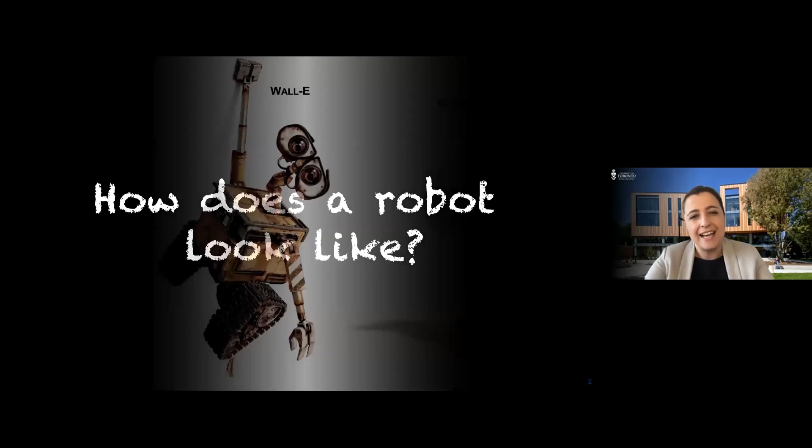I guess some of you have been thinking about some robots that you have seen in movies. I put some on the slide. You can see Wall-E and Eve from the Disney Pixar movie, or Baymax from another Disney movie some years back. Those are great robots. They usually show what we roboticists would love to be able to do with our robots, but usually we're not quite there yet.

In fact, most robots in reality do look like those robots on this slide. The majority of robots today, those up here, are used in industrial automation. They are used, for example, in the automotive industry to automate tasks that are repetitive. There's also a huge area of service robotics. The biggest use case is logistics and warehouses, where these tiny robots here are carrying around goods to facilitate a faster logistic process.

Some of you might also have a service robot at home, a vacuum cleaning robot or a lawn mowing robot. And eventually, you have also come across some other service robots like surgical robots. This up here is a surgical robot system from Intuitive Surgical, which is used in a teleoperated mode, meaning that the surgeon teleoperates the robot from a console for laparoscopic surgery.

And then lastly, there are some robots that are more human-like in their appearance. They have arms and legs and walk around, but those are only slowly getting into our realities. They are mostly still research and development.

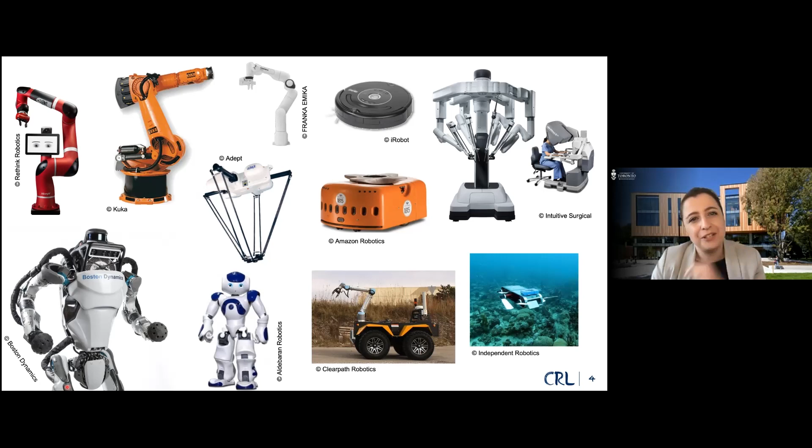The robots that I've been showing you here are in fact not the robots that I'm working on. But before I'm going to tell you what kind of robots I'm working on, I wanted you to know about my favorite animal. Ever since I was a little girl, I loved elephants. I am really fascinated by elephants, particularly by their trunk.

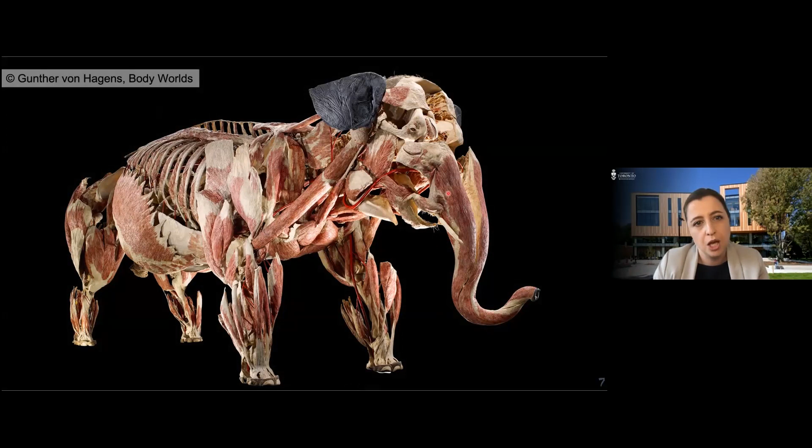In fact, when we look at this plastination of an elephant from Gunther von Hagens' Body Worlds exhibition, we can see that the elephant trunk itself is composed of a multitude of muscle fibers, 40,000 to be exact. The elephant trunk is a muscular hydrostat, which enables the elephant to control groups of these muscles to bend, twist, and elongate.

So it's only natural as a researcher to ask the question, can't we build robots with no joints in order to resemble similar motion capabilities? Isn't it possible to build a robot that acts like an elephant trunk and that can bend continuously, twist, wrap around objects, and reach places hard to reach?

As it is in science, we all stand on the shoulders of giants. I have not been the first elephant enthusiast and roboticist asking this question. In fact, this area of continuum robotics research is about the same age as robotics in general. The first continuum robot was developed in the mid 60s, which you can see over here. It was developed by two students, Scheinman and Leifer at Stanford University.

They developed this pneumatic-driven continuum robot that you can see here, which is now on display in the Computer History Museum in Mountain View, California. They abandoned it because the movement was not very precise, it wasn't a great robot, and it was quite short. But you can already see that in later research, this elephant never really left researchers' minds, and they have been building all sorts of robots resembling elephant trunk-like structures.

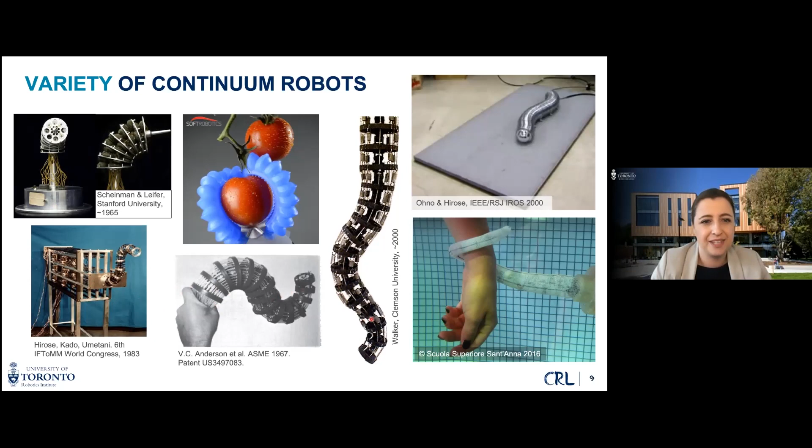In fact, there are also some commercially available continuum robots that you can see over here, for example, from Festo or OC Robotics. These continuum robots resemble pretty much the size of an elephant trunk, whereas this one over here is even longer. This continuum robot you can see over here is the longest available. It's 5 meters long, 3 meters of which can be actuated.

But these continuum robots have a problem. While they resemble the elephant trunk nicely, and they are certainly really amazing to watch, they didn't bring any benefit to robotics, particularly not to industrial automation, because the size and payload, so the size of the robot versus the amount of load it can carry, is really not that great. This robot over here can only carry 3 kilograms of payload.

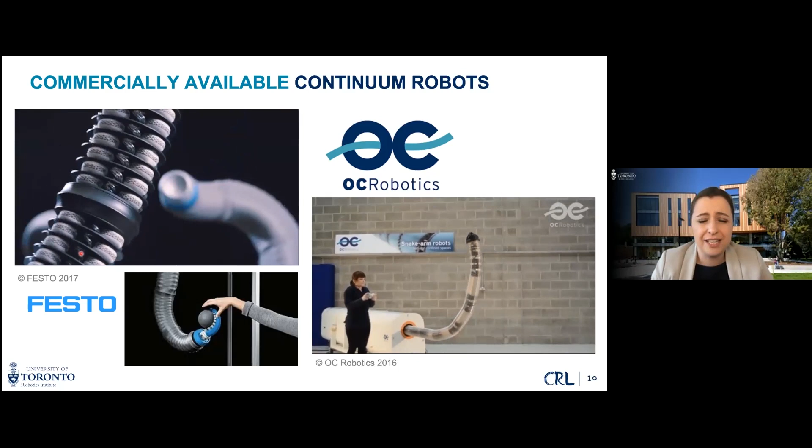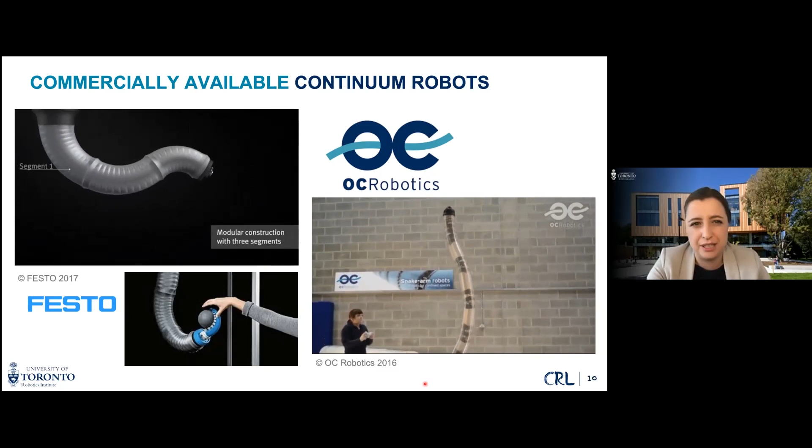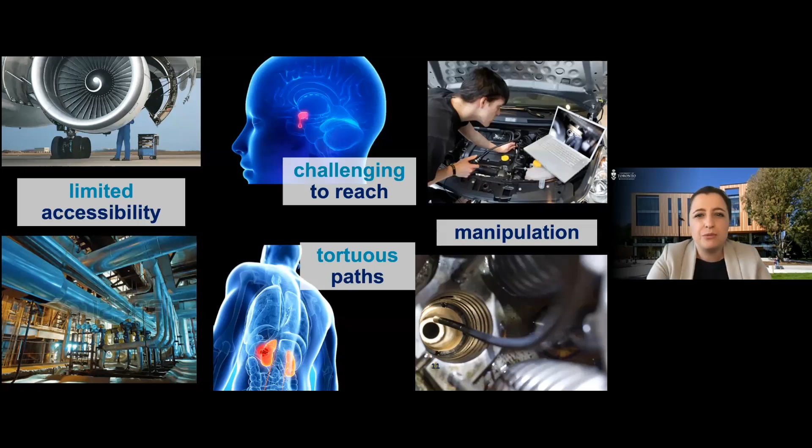Now, this doesn't go well with most industrial automation tasks. And that robot over here also has a pretty low payload. So there was really no advantage in building a robot that can resemble an elephant trunk, other than these motion capabilities being really amazing. These continuum robots do actually not help us in any of these tasks that I have on this slide here. Existing continuum robots and any other robot out there cannot really address what I envision them to do when I'm thinking about this elephant trunk and its motion capabilities.

When I see this elephant trunk, I'm thinking of all sorts of applications which could benefit from something as dexterous as the elephant trunk. Any application that has limited accessibility. Any application, for example, in medicine, where you would like to reach a location deep-seated within the human body, like in the center of our brain or in the middle of our abdomen, like the kidneys.

And I'm also thinking of, once I reach these locations on curvilinear path, how to manipulate at the site, do some inspection, for example, or some small repair, or a tiny little surgery. So while the elephant trunk is really motivating for me, the size is not. So the robots that I am working on are small robots without any joints. And these small robots without any joints are also continuum robots. I'm just interested in those that have a smaller diameter to length ratio.

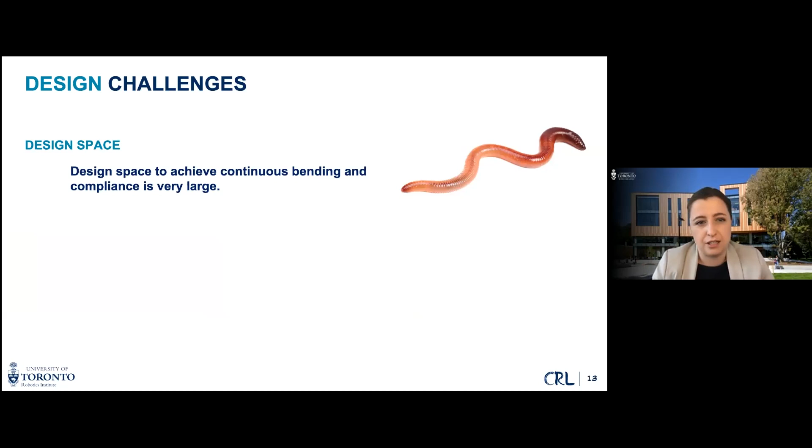In the Continuum Robotics Laboratory, we are designing these robots. We build them from scratch in-house. And in doing so, we are facing a lot of design challenges. First of all, the design space to achieve these continuous bending motions, and also the compliance that we see in the animal kingdom, is quite large. Second, there are many different design paradigms that we cannot follow, because many of the design paradigms that we teach our engineering students are usually making use of rigid elements. And so having no rigid elements in a robot is somewhat unfamiliar to us designing these kind of robots.

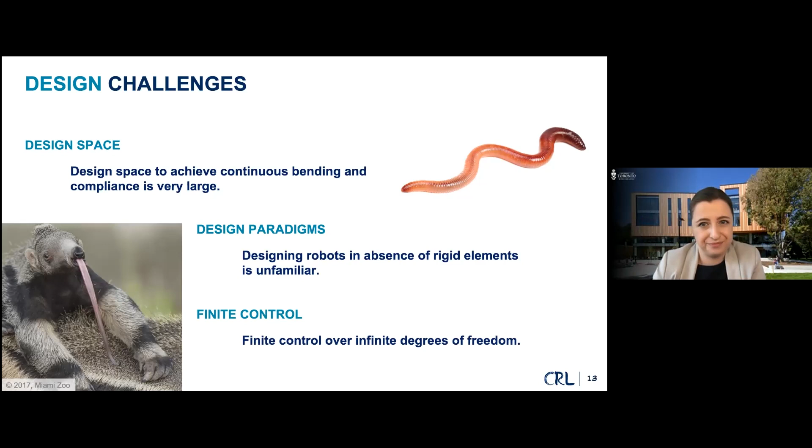And lastly, while these 40,000 muscle fibers in an elephant trunk sound amazing, it's going to be really hard to control 40,000 instances of an actuator. So we will need to live with a finite control over these theoretically infinite amount of degrees of freedom. So how do we go about this? How are we designing continuum robots?

Intuition could tell us, well, we could stick to what we know. We could stick to what works well. So we could stick to what we know from serial robot arms, just connecting joints with rigid links, a couple of revolute joints, all in series, and then making these links rather short, such that we have a discrete structure with motors in these individual links that could drive this snake-like robot. This is a good idea and has been helping in developing these larger scale continuum robots, but it doesn't really miniaturize well, because there's obviously a physical boundary in terms of how small you can make these motors and how small you can make these links.

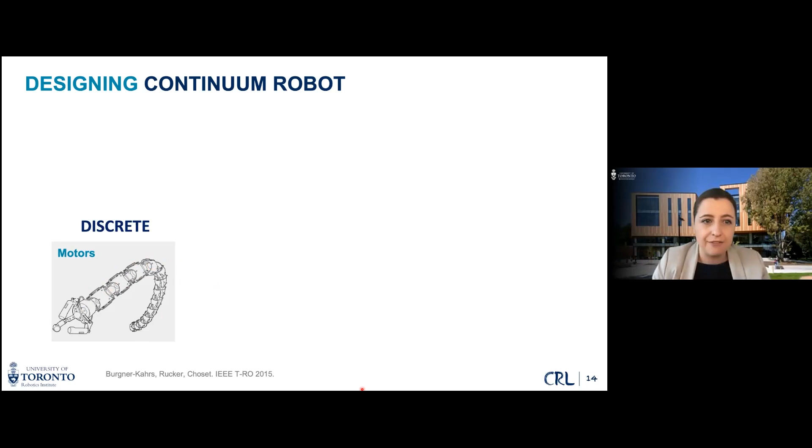So rather than having a discrete structure, we are more interested in building continuous bending structures in order to achieve smaller diameters. One idea to do so is to, for example, use pneumatics and hydraulics and build a soft body such that when you pressurize it, it would undergo bending or torsion. We could also use shape memory alloys, shape memory springs, for example, that we could embed in a soft structure. And then by changing the temperature of this shape memory alloy, we could make the body also bend or undergo torsion. Yet these pneumatics and hydraulics, as well as shape memory alloys, are usually suffering from not so favorable dynamic and control challenges.

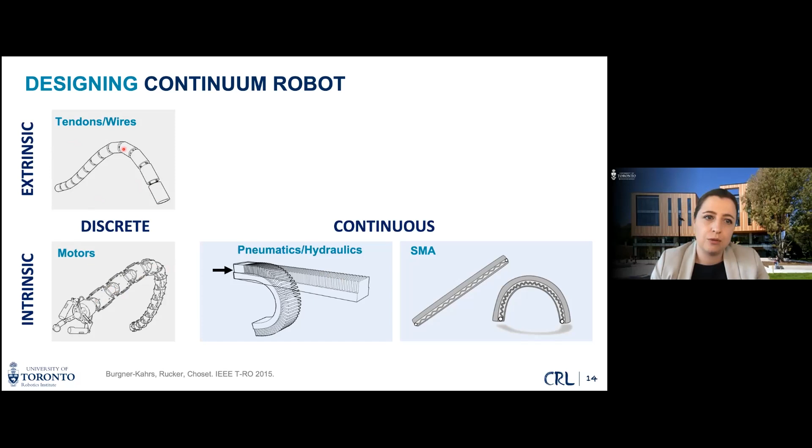So there should be another way to build these continuum robots really small, such that we do not have to face these challenges. An alternative to go about continuum robot design, rather than using intrinsic actuation, so embedding the actuation within the continuum robot, is to think about extrinsic ways to actuate the robot such that its body can be smaller. For example, in the discrete case, we could think about replacing these motors in these individual links by just tendons and wires that we route through and actuate at the back end. That way, we could make the body a little smaller. Yet, it would still be discrete, so not really continuous. So we would still be challenged to some extent.

Building a continuous structure then would require us to also get rid of any of the rigid links and rather have a continuously bending backbone, a flexible material. And then we route, for example, tendons or wires along it that we terminate at different locations and also actuate at the end extrinsically. And ultimately, having a continuous structure which would not require any tendons anymore, that would be a telescoping tube structure.

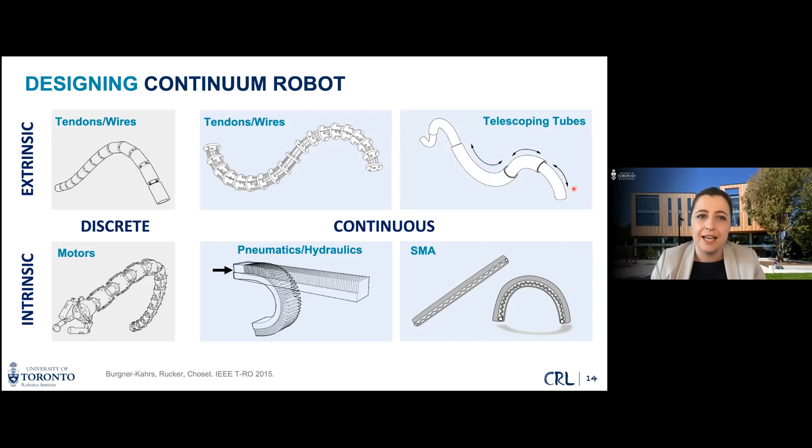In the Continuum Robotics Laboratory, we have been innovating on a couple of those ideas over the past decade. So I'm going to show you some continuum robots that we have been building and also the scale at which we have been building them.

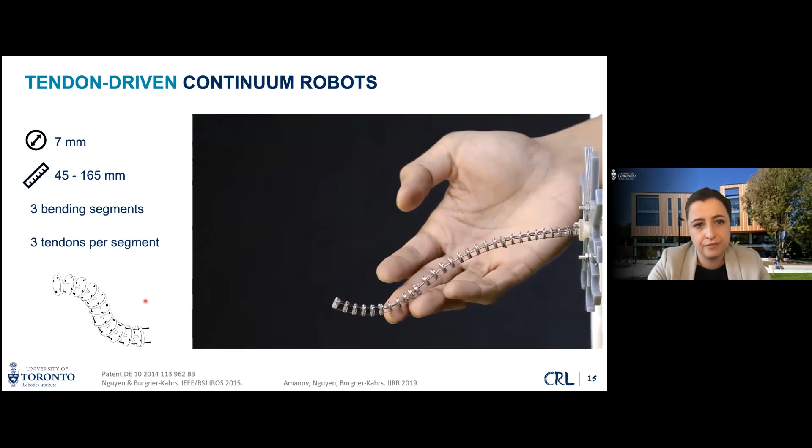The first one makes use of this tendon-driven paradigm, such that we have an elastic backbone in the center. It's a nickel titanium tube. And then we route tendons along its length. These red threads that you are seeing here are the tendons. And we terminate them at different locations to realize a segmented structure such that we can individually bend 3 segments of this robot. This robot's diameter is 7 millimeters, so rather small, and it can change its length from anywhere between 45 to 165 millimeters.

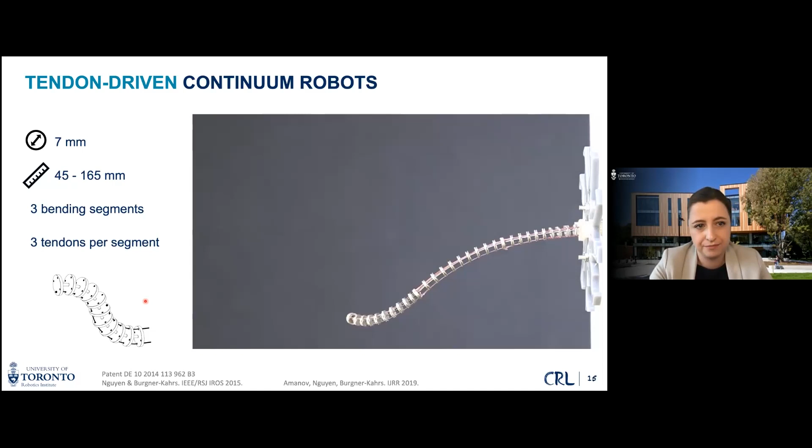With such a tendon-driven structure, we have a huge advantage. We can make use of morphological computation, which is an idea that also stems from biological systems that use their body to control basic actions. This robot we're seeing here, or any continuum robot pretty much, has a computationally powerful body in that sense that there are some encoded properties.

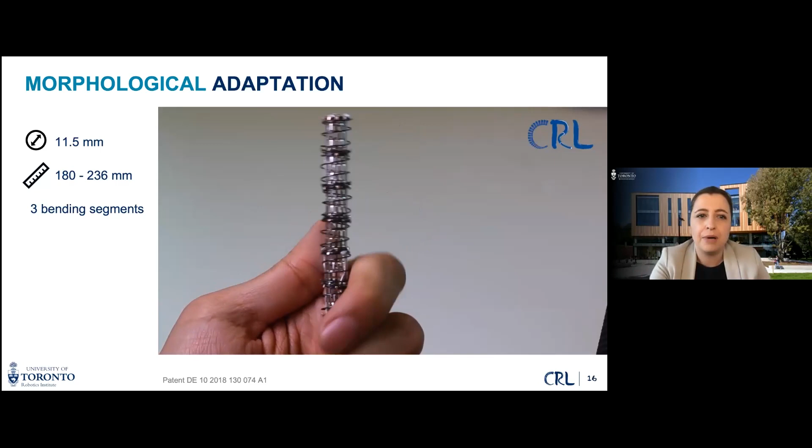This continuum robot you're seeing here, for example, can grasp or hold onto objects by just actuating and pulling on a tendon. And you can see wherever this object or the finger of this user is, the robot can adapt its body to hold onto it. So it leverages its embodied intelligence, which is a huge advantage as these continuum robots are uniquely flexible.

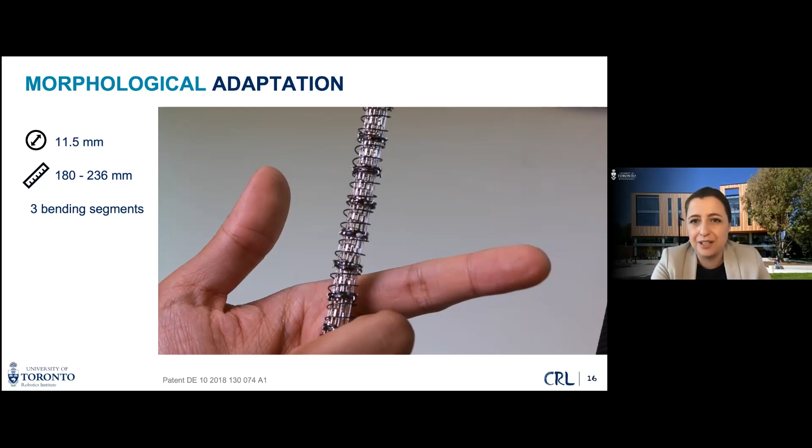And in conventional robotics, this has usually been overlooked, that we could use that body to embrace its environment and purposefully make contact to hold on to something. That's a huge difference between continuum robots and rigid-link robots.

Now, the continuum robots we have been seeing on the previous slides were rather short. Just recently, we have started to investigate how we can build a longer yet lightweight tendon-driven continuum robot. And a very recent prototype that we just built over the summer is visible here. It's an extensible origami robot. The idea here is that we use an origami body. So the body is completely made out of paper in an origami folding.

Then we route tendons through it. So the whole structure is light as a feather because it's made from paper, and there are just these tendons routed through it. And then in the center, there's still a nickel titanium super elastic thin tube such that we can actuate the length changing. And that way we could achieve a rather long robot, as you can see here. In full extension, it's 500 millimeters long.

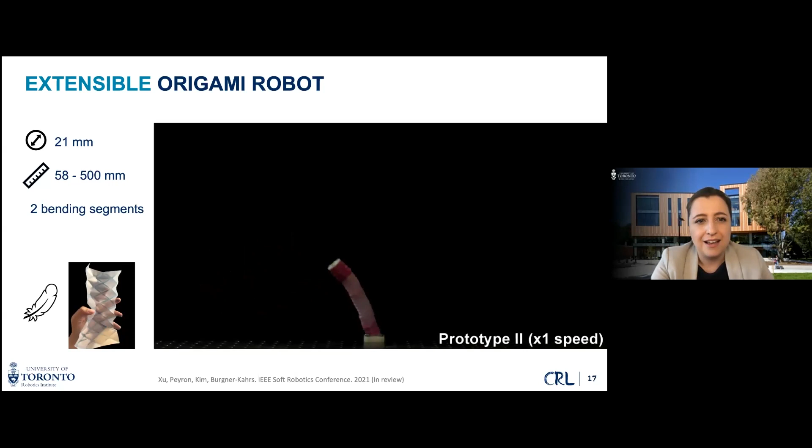And as you can see here, it has the great ability, thanks to this inherent origami structure, that it can extend and contract rather fully, as you will see in a minute. So this robot can be as short as 58 millimeters.

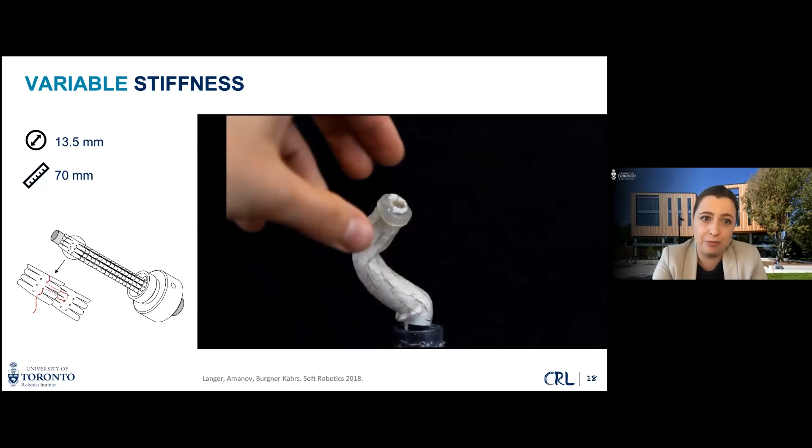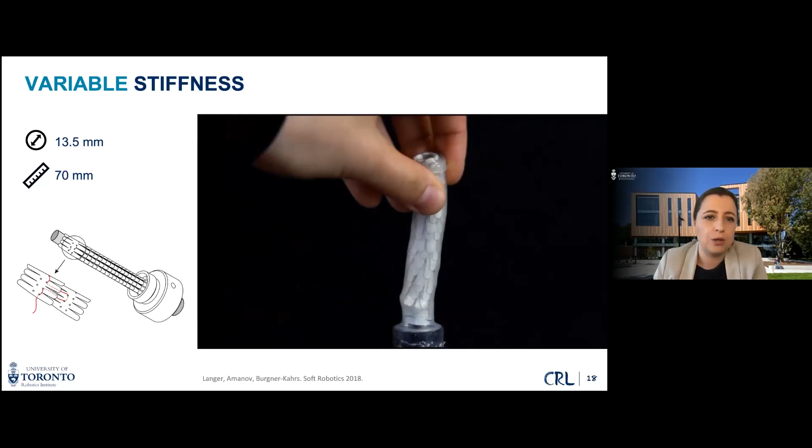One inherent challenge that we have in continuum robots is that these robots are compliant, obviously, so they deform when they come into contact with the environment, which can be desirable, but on some occasions, it may also be desirable to stiffen the robot. And this is a principle I'm showing here. We have been working on a scale-like structure that we enclose in a silicone bladder, and then by drawing a vacuum, you can see that this sheath will stiffen in whatever configuration it's in.

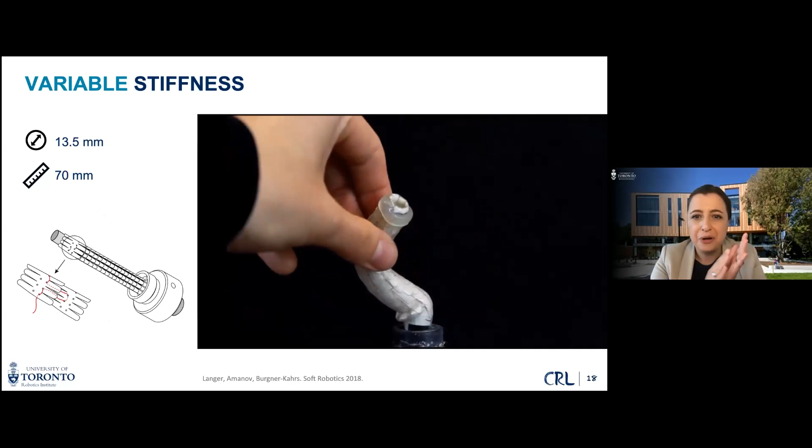So right now we draw the vacuum, and then these scales are going to be pushed on top of each other, and the pressure causes them, thanks to the surface roughness, to have enough force in between such that we can stiffen the structure in any given shape, which could be cool to put around a continuum robot. Once it reaches its location, we can stiffen the structure up to have more stability to perform a certain task.

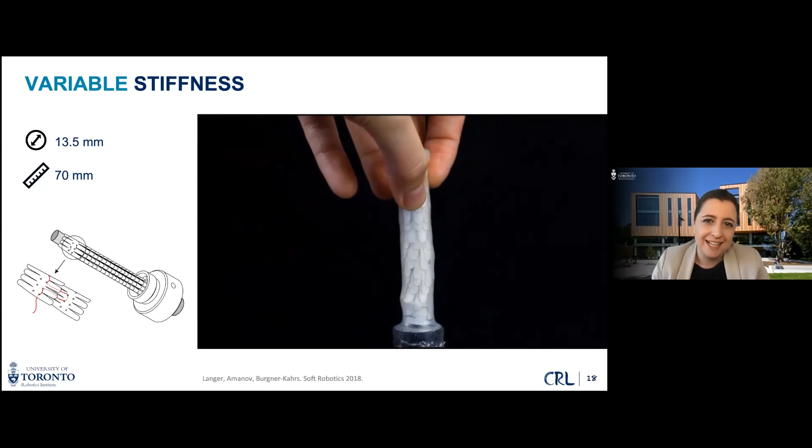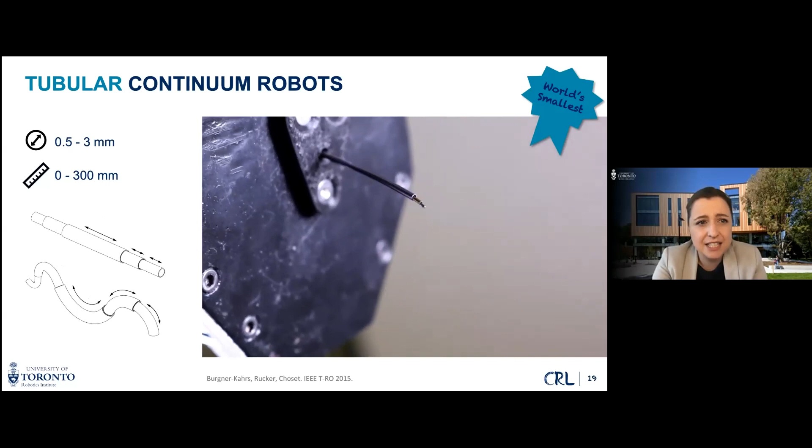Now, all of these continuum robots have been 7 millimeters up to 20 in diameter. But I also want to show you the world's smallest continuum robot that we have been working on over the past decade. This is a so-called tubular continuum robot. It only has a diameter of 0.5 to 3 millimeters.

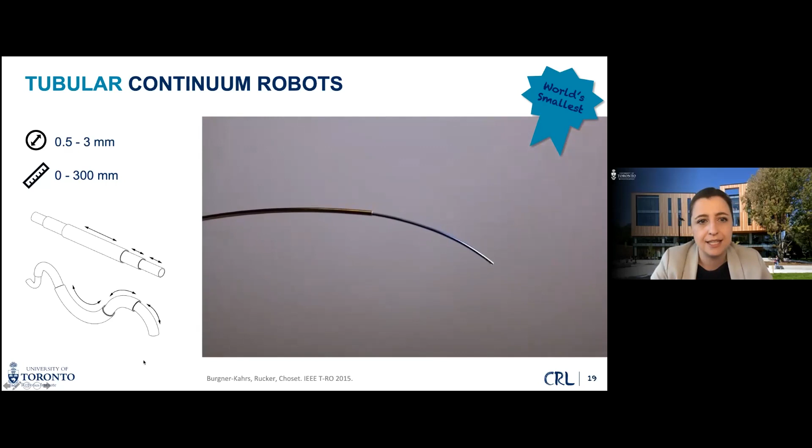So you can see here it's composed of these super elastic tubes that are pre-curved. It's a shape memory alloy. Then they are used in their super elastic state, put inside of each other, and then we translate them and rotate them at their back ends to achieve this tentacle-like motion.

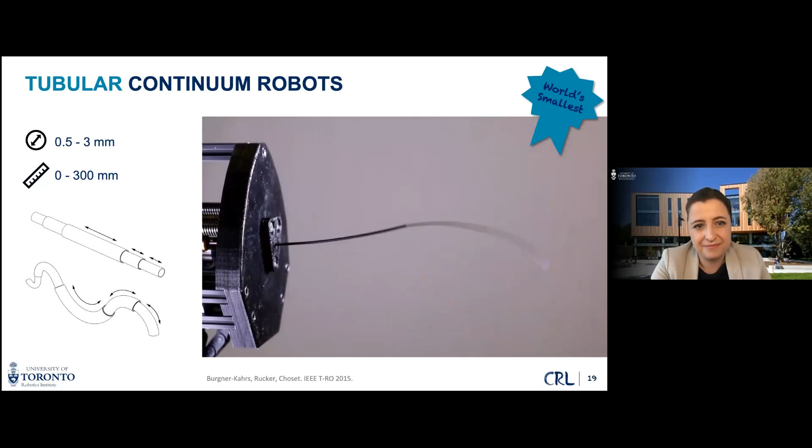This is the smallest we can do today. It's a needle-like structure. You can probably imagine this being very useful for some of those applications I mentioned earlier, where you really want to sneak into some place to perform a task.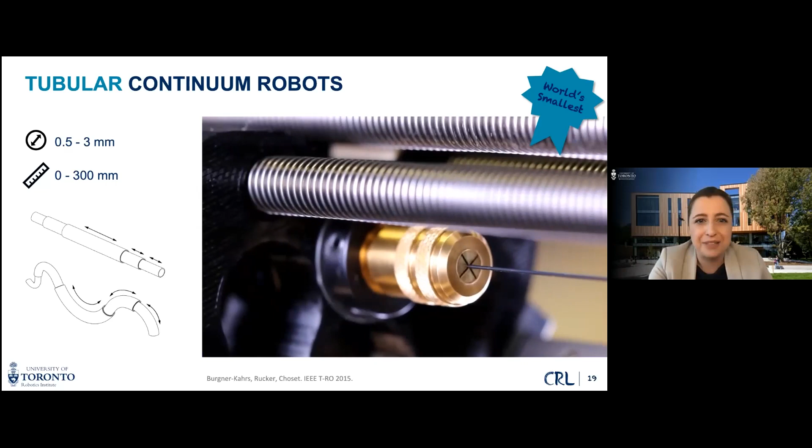Now, I am quite sure that many of you have been wondering how we can mathematically describe these continuum robots. How do we know how much tendon tension we have to apply to make this robot move? How do we know how much we have to push and pull on those tubes or rotate them in order to have a certain shape?

No worries, I'm not going to get into any equations and continuum mechanics here, but I want to give you an idea about the challenges we have in mathematically describing what this robot is doing.

From what we know from conventional robots that are made of rigid links and joints, what is usually done is we can use geometrical relationships because the links are rigid and we know how much a joint has been moving a certain number of degrees, and so we can pretty much compute where everything on this robot is.

We could leverage this concept in continuum robots too by just approximating the robot with a couple of linear links, which would obviously be feasible, yet quite an approximation and only kinematic wise, because we would not look at any forces acting on the robot and would probably also not be able to reflect any of the flexible and elastic properties of our robot.

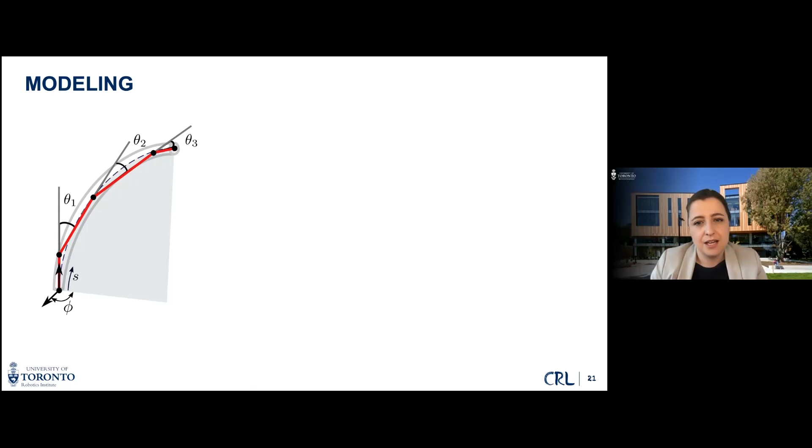So what we have to do in continuum robots is quite different from what we know from conventional robots. One idea that has been followed by a multitude of researchers is that we approximate the robot by a series of constant curvature arcs in space. An arc is characterized by its length, its radius, or curvature, and the bending plane. And so you can think about adding multiple of those after one another, such that you could approximate the shape that a continuum robot has.

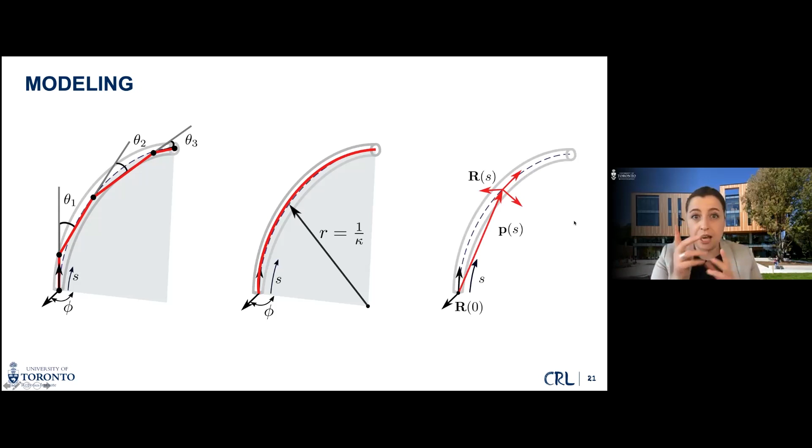By me saying approximation, you can already guess this is also not the most accurate way to do it. Particularly, it can have issues when the robot is subject to any external loads or external forces because it interacts with the environment. So this is really super useful when it's used in free space. But once we move to a real application where we have interaction with the environment, we need to be more sophisticated in modeling. And the most sophisticated model today really describes every point along our robot in terms of its position and also its material orientation. This is the so-called variable curvature model that I depict over here.

Now, by representing the robot by its position and also its material orientation along its length, we can then also embed all the phenomena that this robot is undergoing, like the elastic deformation that it's experiencing is going to put small strains on its backbone. And so we can model this robot as a beam, which is undergoing linear elastic deformation, where the stress experienced by the backbone is linearly proportional to the strain.

The change in state can then be completely specified by keeping track of the orientation of the material prior to its orientation before deformation was applied. We can relate those through strain variables, use continuum mechanics, and particularly the Cosserat theory of elastic rods to establish an explicit set of differential equations that we can then solve for the shape of the robot.

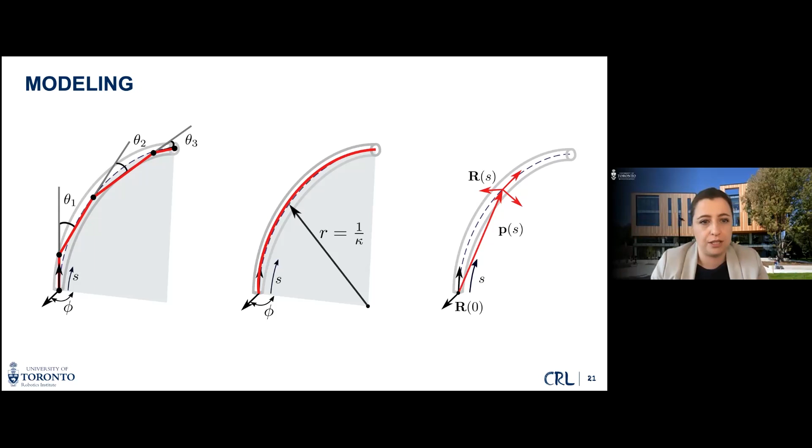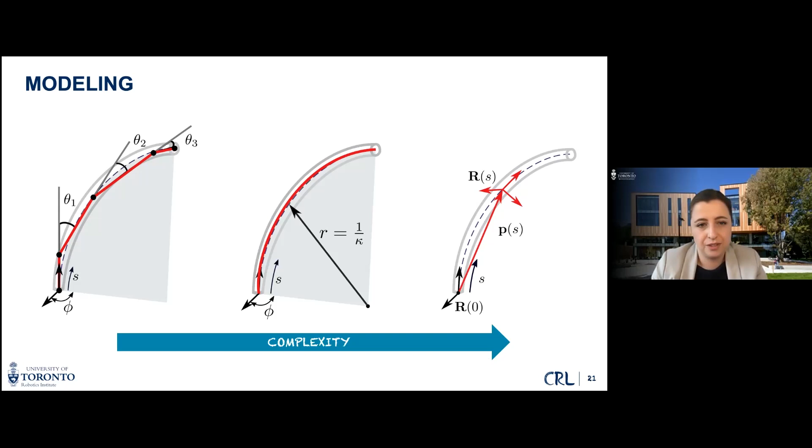Obviously, the complexity rises when I go from the conventional model in robots that I know towards this most sophisticated model of a continuum robot. But with this rising complexity, the accuracy also increases because I am including phenomena that my robot is subject to. Luckily, we and our fellow continuum roboticists around the world have made significant progress in modeling over the past decade. We achieve reasonably good accuracy. Let me tell you what that is.

We can see two of the robot types here, this tubular continuum robot, world's smallest, and this tendon-driven continuum robot that we have been seeing earlier. And down here, I have plotted the error that I observe at the tip of the robot and the occurrence of this error over a certain set of experiments. Here we put the tubular continuum robot into 80 different possibilities of how to rotate and translate the tubes. And then we have looked at how well this model can estimate where the tip of the robot is.

And we see there's quite a peak over here in the 1 to 2 millimeter region. And we can also see that for the tendon-driven continuum robot, this error distribution looks about the same. Bottom line is that the model has an accuracy of about 1.5 to 3% with respect to the robot length. So for example, if the robot was 300 millimeters long, the error at the tip becomes about 4 to 9 millimeters, which is reasonably accurate. For comparison, the industrial robots that are used in automotive industry are usually an order of magnitude more accurate. Yet, this is the best we can do because it's much more challenging to model these robots.

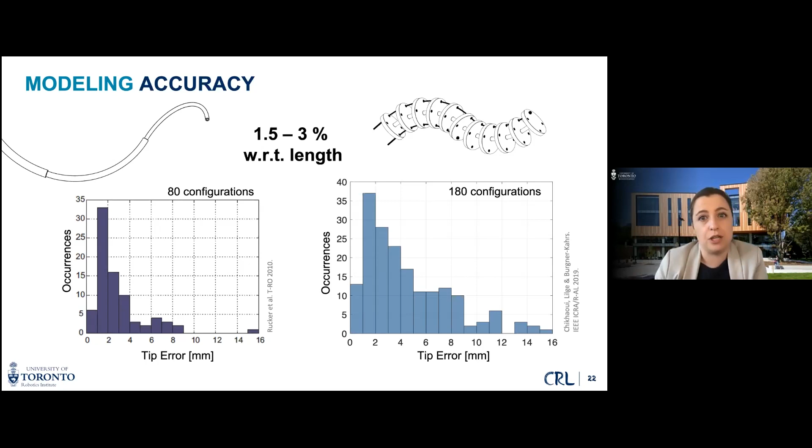Now, rather than trying to model the physical effects which constitute the motion of our continuum robot, we have recently started to investigate how machine learning approaches can help us to improve the modeling accuracy. Rather than trying to physically model everything, we are now using data that we collect from our robot. For example, we observe where the tip of the robot is in 60,000 different cases by just using a sensor that we put at the tip of the robot, measuring its location in 3D space.

And then we put this into a feed-forward neural network, a machine learning method, and see how this relates to the actuation parameters. For example, how much we pull on the tendons or how much we push and rotate the tubes. And by putting this amount of data through this neural network, we were able to show that the accuracy of this estimation of where the tip is actually becoming better. It's now below 1%. And this is probably due to the fact that this machine learning approach is implicitly considering all these effects that we haven't been able to model yet. For example, friction.

Estimating the force acting on the robot's tip is also really important, and we have also tried this machine learning approach by using the robot as a virtual sensor, putting a couple of different forces at the tip, measuring using a camera system where the shape is, and feeding our neural network with this information to estimate what was the force that the robot was experiencing, and also achieved quite remarkable results here. In general, we are starting to explore these data-based approaches more in order to understand how well this robot could be governed by a model.

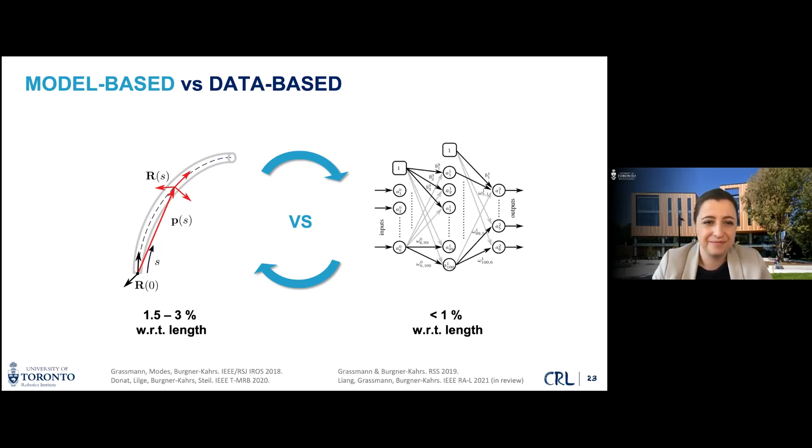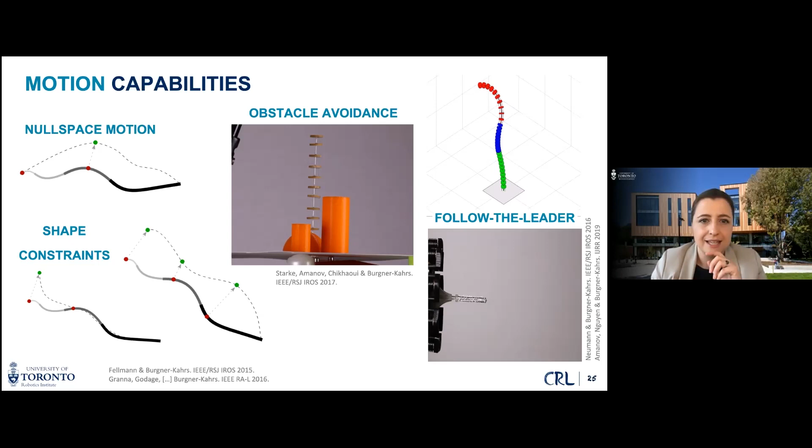Now, while we are studying these motion capabilities, a huge challenge that we still have, and that's why I'm feeling like this baby elephant, is now that we can plan for these motions and use the model to evaluate the possibilities of motion, how to get this pre-planned or desired motion onto our robot. So how can we make the robot actually perform these motions? How can we control the robot such that it pulls on the tendons, pushes and rotates the tube in order to achieve them? The challenges we face as being a baby elephant is that we are having a nonlinear system, right? So the number of kinematic degrees of freedom approaches infinity, which makes it really hard to be mastered.

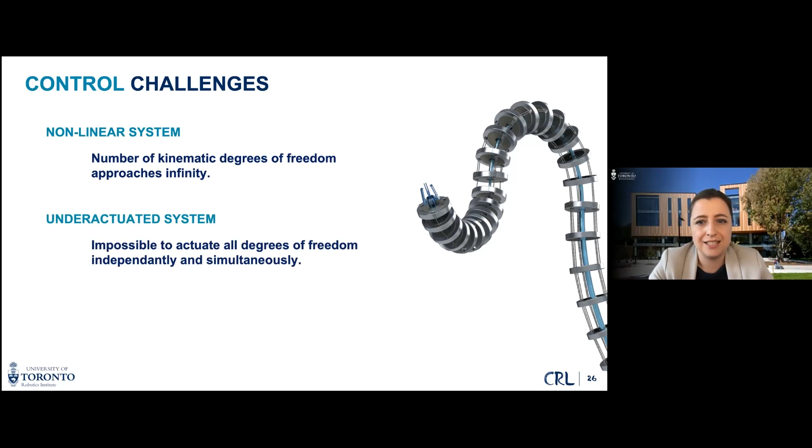Secondly, we are facing an under-actuated system, such that while this elephant is able to use these 40,000 muscle fibers in groups, for us, it's not possible mechanically to recreate this. So we are facing the challenge of the impossibility to actuate all these degrees of freedom independently and simultaneously. And probably the biggest challenge from my perspective is that these continuum robots are ill observable. It is almost impossible, as they are so small, to obtain sensory information on all the degrees of freedom.

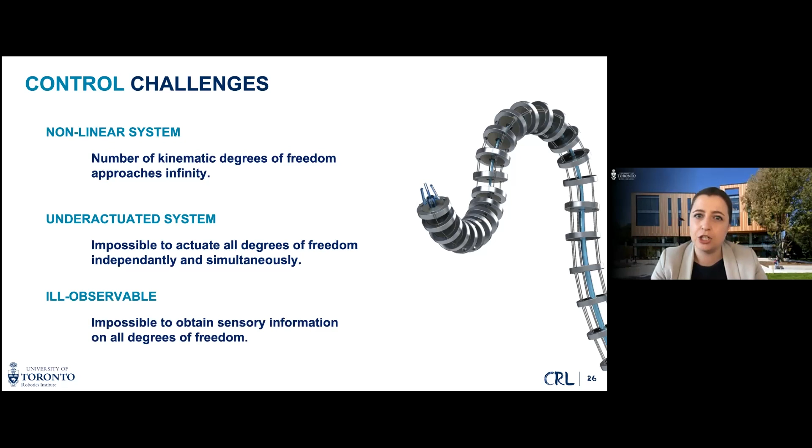Remember, I've been mentioning when we're looking at where the tip of the robot is, we have been putting a small electromagnetic sensor in this case at the tip of the robot, just measuring this one point. But now looking at this robot here, we would really not only want to be able to measure where the tip is, but it may be really important to know where this entire shape is. Envision this robot being within a human body. We really want to know accurately where it is.

So you may be like, why do we need to know it? We can model it, but the model has some errors, right? Even though we can get it down to this 1%, it's still a couple of millimeters, which might be too much depending on our application. So finding suitable sensors to give us feedback on not only one position on the robot, but multiple positions is still an open problem because my robots are too small and many sensors are simply too big.

I've mentioned electromagnetic sensing as one possibility, yet they have a limited range. We're often using cameras in our lab to perform benchtop experiments, but as these robots are foreseen to move within some objects, we won't have cameras to be able to see through. Another thing that we could use is optical fibers with fiber Bragg gratings, for example, to obtain discrete strain information, which could help us to then reason about the shape. But still, this being ill observable is really an issue in terms of controlling these robots.

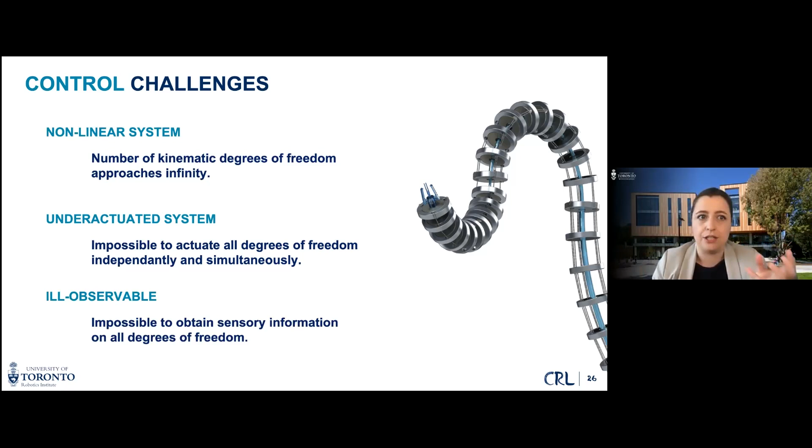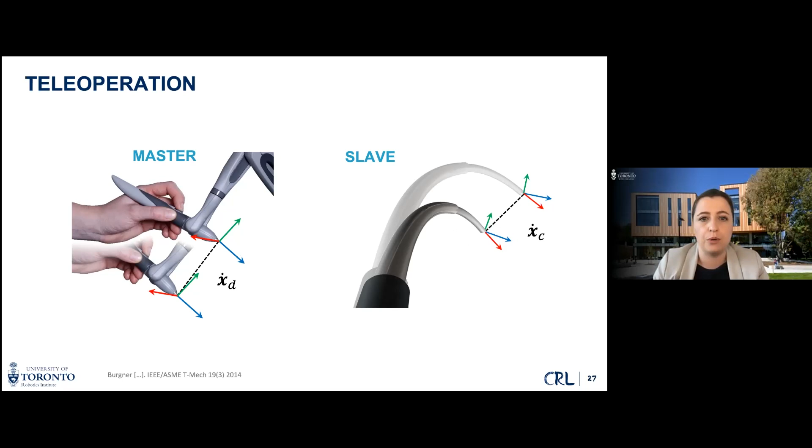Yet we are not really where the baby elephant is, right? So we are a little further than the baby elephant I've been showing you. We have advanced quite a bit. And what we mostly do is that we cheat by using a human in the loop. Rather than thinking about these sensors, which are not there yet, we are using the human as a master for the robot. We are using the robot in teleoperation. So the human gets an input device like this pen-like stylus over here to command a motion that is then reflected on the robot using the model that we have.

And you can see how this tubular continuum robot you have seen earlier is now orchestrated by the user and performing the exact same motion, which is great because the human can account for all errors that we have in the model. If the robot is not perfectly moving to where it needed to move, the human will very likely adjust the orchestration, adjust how it's commanding the robot. And so we can account for some of the problems we see.

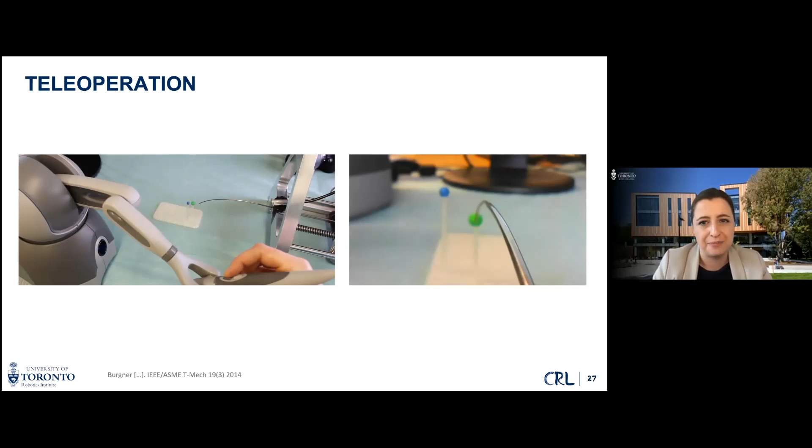Now, in the last part of today's talk, I would like to speak about the huge potential of continuum robots. I'd like to focus on surgery here. I have been fortunate enough to work with a couple of great collaborators. And while a lot of the research I have been presenting earlier in the talk is following a bottom-up approach, like focusing on fundamental findings, methods designed for continuum robots, when I'm looking at surgical applications, we almost always naturally come top down. We talk to medical doctors, show them the capabilities of our robots, and then they get very excited, and we can then also approach the continuum robotics research from the top, thinking about applications.

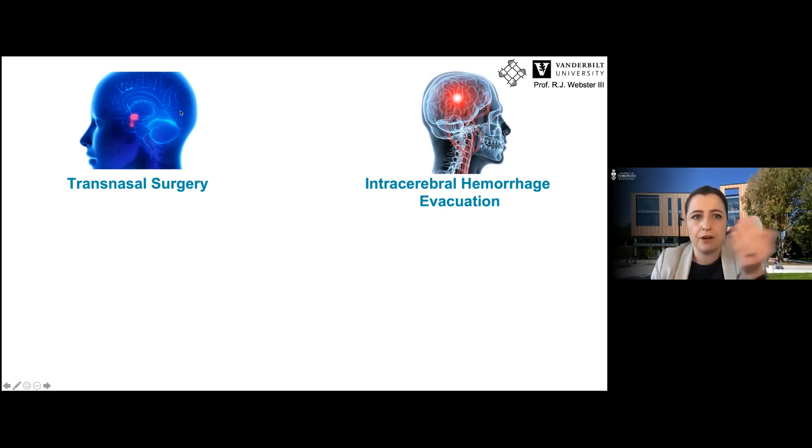These are just two examples from my career, which have been mostly performed at Vanderbilt University, where I was fortunate enough to work with one of the pioneers in continuum robotics, about 10 years ago, which were concerned with transnasal surgery and intracerebral hemorrhage evacuation. In transnasal surgery, we were interested in using a continuum robot to enter the center of our brain to remove tumors through the nose on an almost straight path and then curve at the very back end to remove this tumor using a continuum robot.

We have been building a prototype back then that has been inserted through a single nostril all the way back. There's just one sinus you have to pass. You drill a little hole, and then this robot can really enter through this little hole, entering the center of your brain to remove pituitary tumors.

And on the other side, we see this intracerebral hemorrhage evacuation, which is concerned with sucking out blood after stroke. For example, if a blood vessel burst within the brain, a continuum robot could be used through a little burr hole on the top of the skull. It could be inserted. It's as small as a needle, right? It could advance to the hemorrhage. Here, this is just a silicone hemorrhage that we have been building with some gelatin inside to prove our concept. And we have been able to show that this robot is able to suck out the blood almost automatically. Now, these have been some great advancements, not yet in surgery, still on the benchtop and in ex vivo experiments.

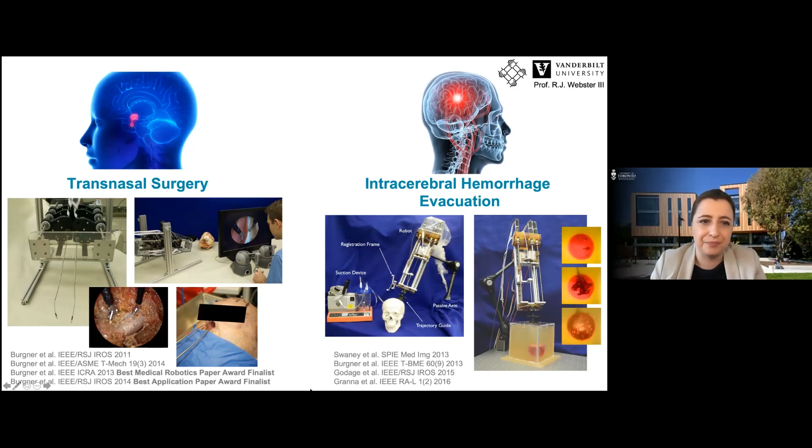And we have achieved quite remarkable results here. So the error in this robot getting to this desired position that we have been marking was below 0.2 millimeters, which is quite amazing and very encouraging for us to follow this approach further.

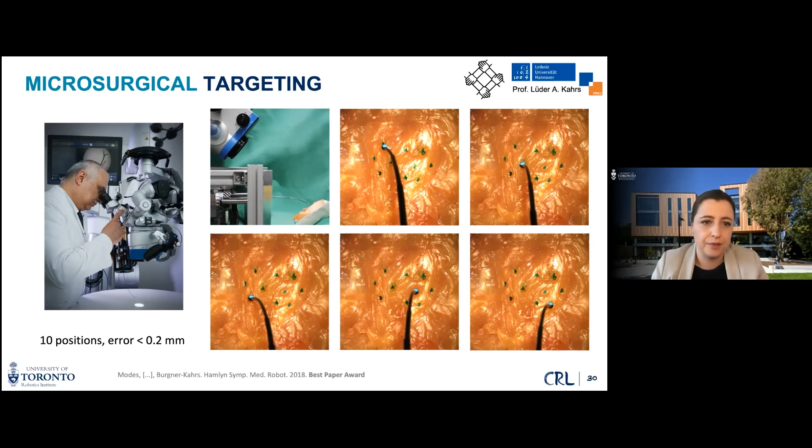And as my last example, I also wanted to tell you about a collaboration that we did with the medical school in Hannover, Germany, over the past 3-4 years, where my PhD student, Ernar Amanov, and Professor Florian Imkamp, a urologic surgeon, have been thinking about building a continuum robot, which would not need to access laparoscopic surgery through multiple incisions in the abdomen, but rather through just a single incision at the navel.

And then this continuum robot being able to bend and turn around can be used as a base for further continuum robots to perform surgery, for example, on the kidneys to remove a tumor. This would greatly reduce invasiveness of the surgery.

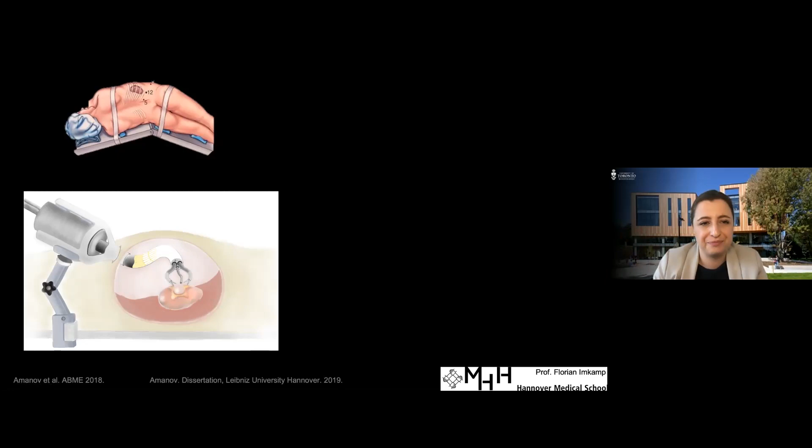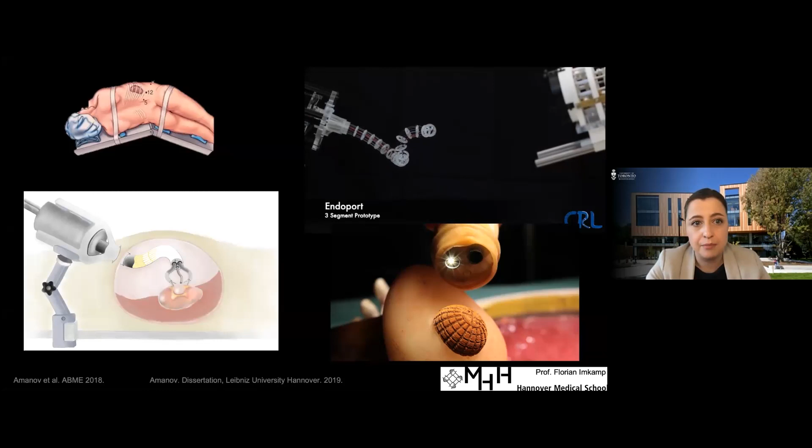And during his PhD work, Ernar built this robot prototype that we're seeing back here. By now, you know more about continuum robots. So this is a tendon-driven continuum robot, as you might be able to tell. And you can see it has 3 segments, 2 shorter ones in the beginning and a larger one at the back to steer. And then here, you may also be able to recognize the scale sheath for the variable stiffness from earlier that has been integrated with this robot.

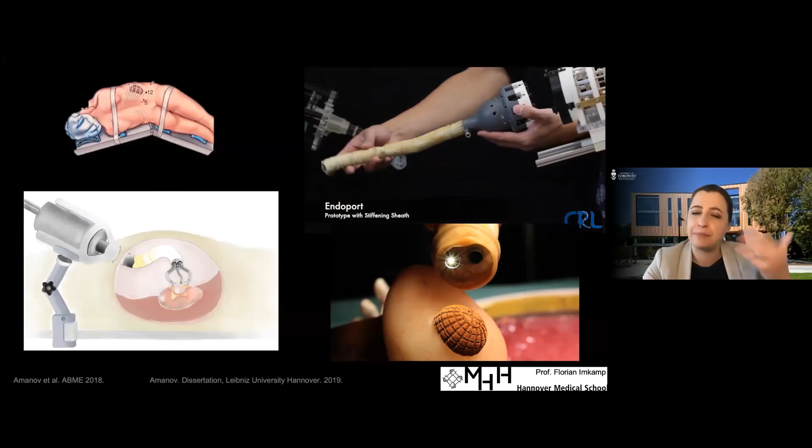Then it has been built in a way that it can be sterilized and mounted to the actuator part, which has all the motors that are pulling and pushing on the tendons. And then this robot can be used as a flexible endoport in laparoscopic surgery.

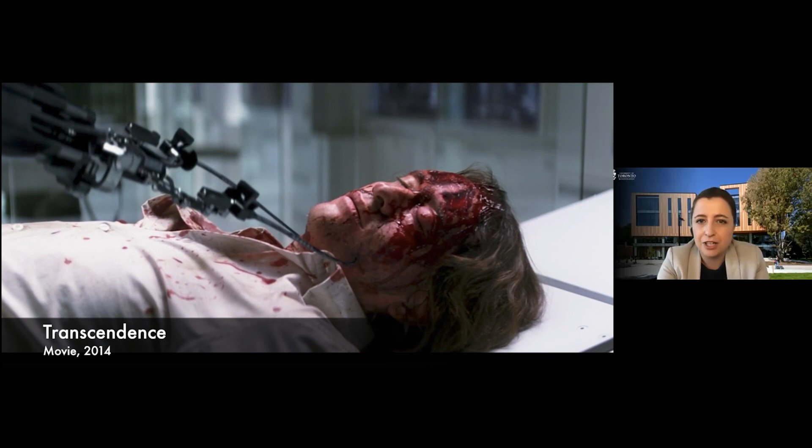I want to leave you off with this vision of mine, how I see these robots being used in the future of surgery, for example. This is a small scene of the movie Transcendence. And you can see what the authors envisioned is actually continuum robots. There's multiple of those, 6 in total, that are getting into this severely injured human through multiple keyholes, performing surgery, performing interventions, commanded by artificial intelligence advancements. Here it's Johnny Depp in the computer controlling the robots as the artificial intelligence.

But you can probably see just from this movie where continuum robots might be heading. They might be able to work with surgeons hand in hand, or even replace surgeons when they try to access locations in the human body that were inaccessible before, or only accessible by making a large incision, for example, at the head or at the skull.